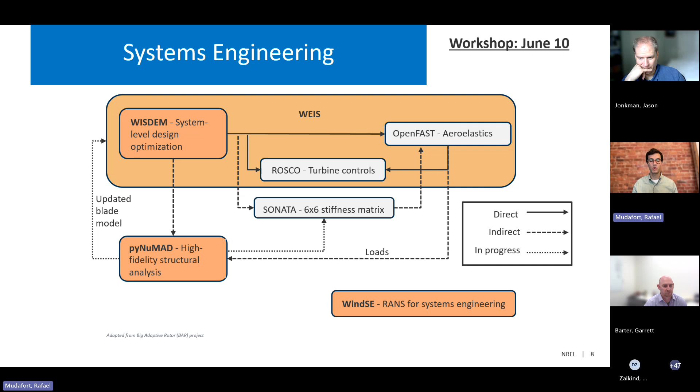And then WindSE is another software in the group down here at the bottom. It's a RANS CFD model that's designed specifically to strike a balance between the engineering scale models and the flow resolved CFD. It's tailored to specific optimization problems. It's not quite tightly integrated into this workflow yet, but it still fits into this category nicely.

The techno-economic analysis and cost modeling sets of tools can be similarly mapped. This diagram shows the tools used in different areas of cost modeling in order to ultimately estimate the total value for wind energy assets. So I'll start here on the right to describe this. WAVES is a software that models capital costs, operating costs, and energy yield to determine a total asset value. It gets the CapEx estimate from either LandBOSSE, HybridBOSSE, or ORBIT for land-based, hybrid power plants or offshore power plants.

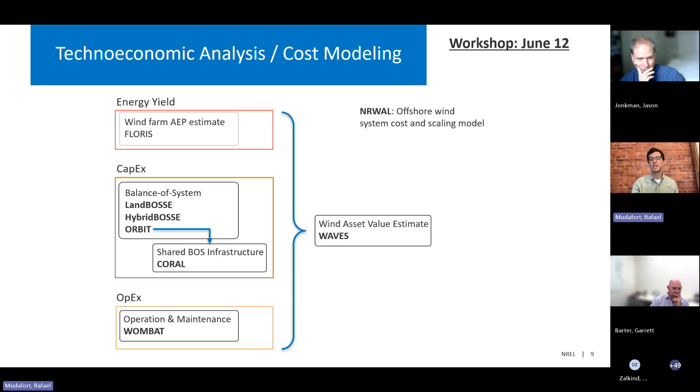And then CORAL is an add-on to ORBIT, for the offshore balance of system costs, to account for shared system installation infrastructure. WAVES gets its OpEx estimate from WOMBAT, and it uses FLORIS to estimate energy yield. FLORIS is outside of this grouping, but it is integrated into this kind of workflow. And then NRWAL, up here on the top right, is a library of cost equations for offshore wind farms, and it uses some of the other tools here to develop its library of cost equations.

The next collection of software are the wind farm analysis and control models, and these are mostly related to characterizing and improving the energy yield of a wind farm. FLORIS is a steady state wind farm wake modeling software.

It's very low fidelity, but also cheap to run and highly tunable to existing data. Its core capability is to establish the energy yield of a wind farm given a set of wind conditions. And this is often used to optimize the wind farm layout or design wind farm control strategy to mitigate wake losses or any other kind of operating losses.

FLASC connects FLORIS to field data. It facilitates working with SCADA data to enable wind farm model validation by connecting directly to FLORIS. It's also used for field experiment design and monitoring. And then OpenOA is an operational assessment software that provides common data structures and methods for analyzing wind plant operational data to determine wind plant performance. It's specifically been used to identify a variety of operational losses, and there are examples of this using open data sets included in the OpenOA repository.

And then Hercules, listed here on the right, is a real-time simulator for wind-based hybrid power plants. It integrates with AMR-Wind, which is a high-fidelity wind farm aerodynamics model in another group of software within the WETO Stack, to simulate a power plant combining wind and solar power production and energy storage. And there's an associated wind hybrid plant controller, and that's kind of the bread and butter here. It's really trying to study wind plant controls and how they can be used to balance the other system costs in this hybrid power plant.

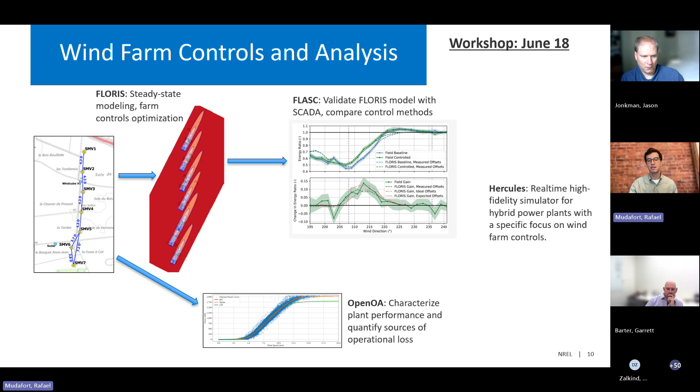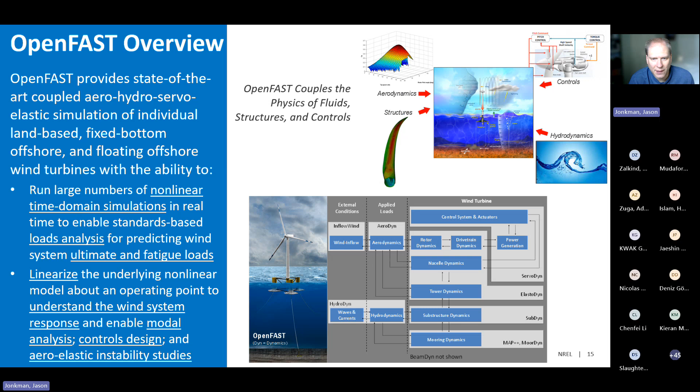This is a slide that kind of shows the core modules of OpenFAST. OpenFAST is basically a very modular architecture.

BeamDyn is our high fidelity beam type model based on geometrically exact beam theory. ElastoDyn is our original structural dynamics model based on some combination of multi-body and modal type formulation, although it's not fully linear - there's quite a few nonlinearity terms in ElastoDyn. But if you're familiar with tools like Flex 5, that's very similar.

SubDyn is our structural dynamics module for the support structure. That's fully linear in the sense of beam elements and linear elasticity. We support in SubDyn Craig-Bampton reduction, so you could take a model like that semi-submersible that likely has 1,000 degrees of freedom for all its elasticity and reduce it down to its core modes, the Guyan modes, plus some.

There's a question there. I'm not exactly sure what that means, but let's see.

And then we have ServoDyn, which is really our controller interface. There's a few built-in options in ServoDyn, but mostly it's an interface for user-defined control, because controls tend to be the sensitive part of the wind turbine system.

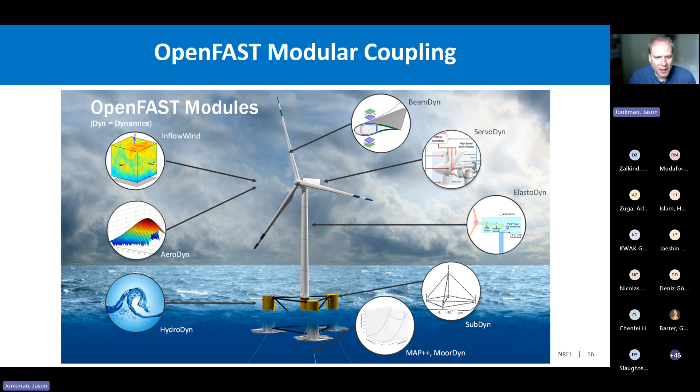Okay, give a quick update on some things that have been happening recently in case you're not fully aware. First of all, we've been working a lot on aerodynamic stability calculations and being able to introduce aerodynamic options that are linearizable for things like stability.

With some new corrections we've made - Emmanuel Branlard presented this at Torque a few weeks ago - we have quite a bit of improvement relative to high fidelity codes now.

For those in the distributed wind community, we've also done some work recently on tail fin aerodynamics, mostly useful for those in the small wind community.

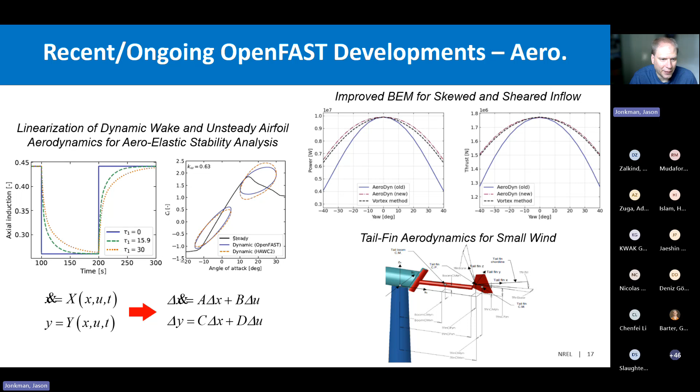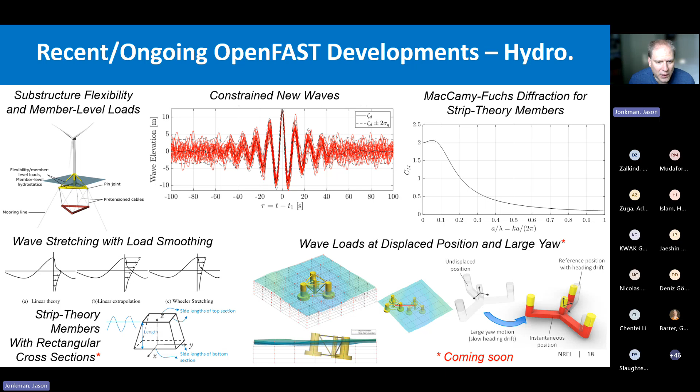On the servo dynamics side, we've introduced lots of active and passive control options. You can now basically anywhere in the system, blades, nacelle, tower, substructure, place as many actuators as you want. Things like tuned mass dampers, in one direction or omnidirectional, can be fully passive or semi-active. You can also place liquid column dampers in the system, again as many as you want, wherever you want.

For offshore systems, we've introduced buoyancy cans into the model. That's useful for things like this spider float developed by Senu Sirnivas.

And then on the mooring system, things like these SeaSpring systems that introduce some nonlinearity in them to mitigate extreme mooring line snap type loads. Really helps with that, and these elements can now be placed in your MoorDyn model.

We also have things like active cable tensioning, where if you have cables within the structure or in the mooring system and you want to actively change their length, you can now do that through a control interface. So all quite new features on control.

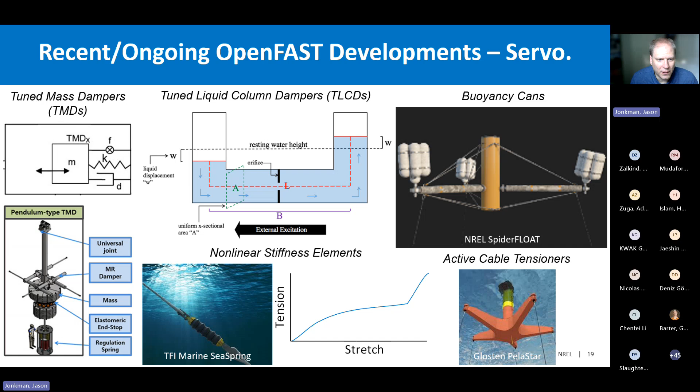On the mooring side, also quite a bit of extensions here. I'm not an expert on these topics, Matt Hall has led the team doing this, but we've introduced synthetic viscoelastic materials, quite useful for synthetic ropes, basically combining a low frequency and a high frequency effect. Used to always have to do these simulations in 2 steps, and now you can do them basically in 1 simulation, which is quite nice.

They've also introduced the ability to do full seabed bathymetry and various kinds of friction models that allow you to really represent the terrain on the seabed. We've also introduced a bending stiffness option in MoorDyn, which is really important for the dynamic power cable.

Coming very soon, I think in the 4.0 release, is also being able to do basically mooring line failure simulations, where based on some given time or a tension threshold, you can have a line break and then watch the system respond to that.

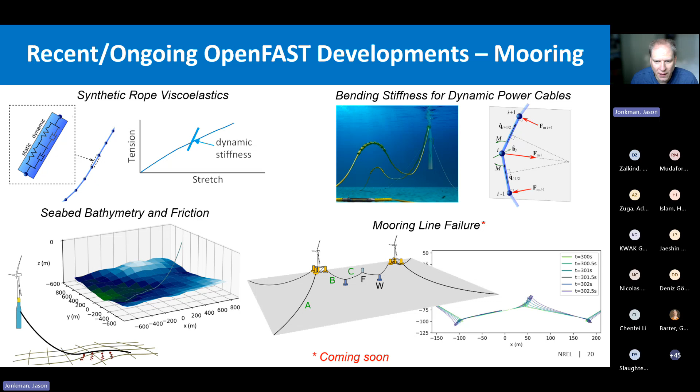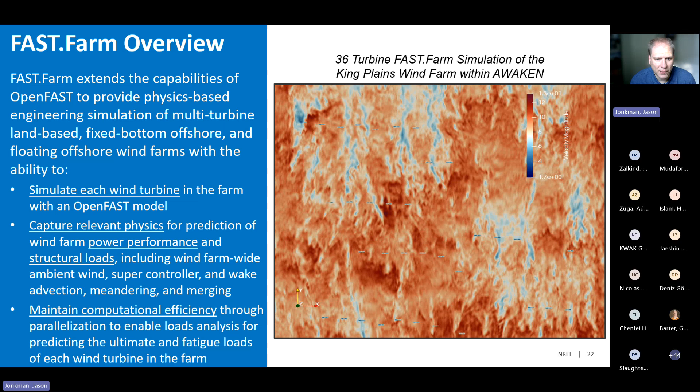Some of the novel characteristics of FAST.Farm: again, we carry the idea of the modularization framework of OpenFAST to the farm level. We've introduced modules for the wakes and the full array effect, as well as the supercontroller. FAST.Farm is based on a dynamic wake meandering formulation, and we've done a lot of work within NREL to calibrate the model to best match large eddy simulation. So really trying to do high fidelity simulations much cheaper.

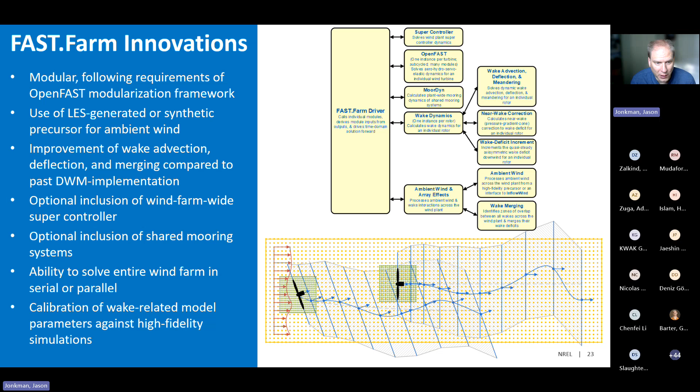Again, you can do a wind farm level controller. We've introduced recently shared mooring systems, so if you have multiple turbines that get connected not just by wakes and control, but also through some station keeping system, you can do that now in the solve. And to make it efficient, we have it solved in parallel mode if you wanted to run these simulations quickly.

So some of the things recently going on in FAST.Farm: one is the near wake correction. We realized several years ago that our model was breaking down if you had high thrust conditions. We based that on the fact that FAST.Farm has had some momentum assumptions in there, and so we've now fixed that by basically having a semi-empirical model that matches at least the mean effect of the wake breakdown in high thrust.

We've also introduced a curled wake model into FAST.Farm for things like wake steering. Often what you want to do in a wind farm is flow control where you yaw turbines, let the wakes deflect and curl away around downstream turbines. And we've introduced this curled wake model now into FAST.Farm, so you can do that dynamically.

This is just showing the transient effect that you see with a curled wake. We do obviously miss some details. If you have a step change in yaw, you get this big vortex structure that we see in CFD. We don't capture that big vortex, but we do capture the timing of the response of the wake.

We presented a couple weeks ago at TORQUE our new wake-added turbulence model. This is quite useful if the ambient turbulence level is fairly low, say less than 10%. What we find is that the wake breakdown, the shear layer in the wake, basically leads to turbulence, which can be quite important to the loading of downstream turbines. We were basically showing an underprediction of fatigue for low TI before this change. And when you add this wake-added turbulence in there, it really helps bring the fatigue back to what we expect it to be.

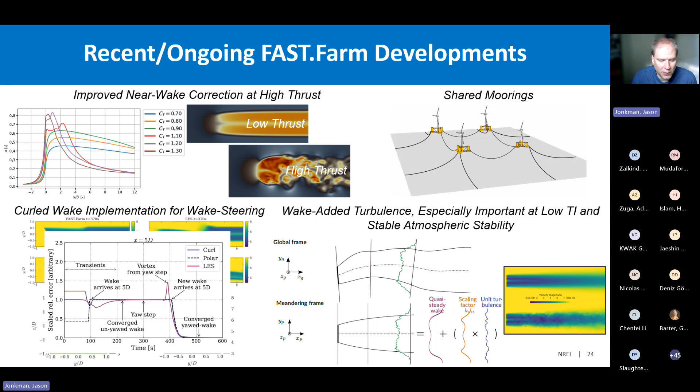As I mentioned before, we also can now do shared mooring systems in FAST.Farm, where every turbine basically has connections together, not just through wakes and control, but also through additional mooring lines. A big part of our effort is also not just developing new capability, but also doing verification and validation. I just have a couple highlights here of what we're doing.

One is our big RAAW experiment that happened down in Texas, where they took the GE 2.8 megawatt turbine and tried to throw as many instrumentation and sensors at it as they could, with a high characterization of the inflow: scanning LiDARs, radars, met towers, profiling LiDARs, not just of the inflow, but also of the wake, so things looking backwards and tracking. What we're trying to say is, if we really know what the inflow is, can our models predict what the response of the turbine is and what the wake is?

You can see the turbine is also speckled, so we have photogrammetry trying to measure deflections and so on as well. So we're really trying to capture the full aeroelastic response and do not just statistical validation, but full time-series validation of inflow to response.

Within the IEA Wind Task 30 OC6 project, a couple of things happened recently: validation of OpenFAST for things like a turbine that's surging and pitching offshore, mimicked here in the wind tunnel through an actuated system. We also did some work validating our hydroelastic capability, say with this tank test of the TetraSpar design.

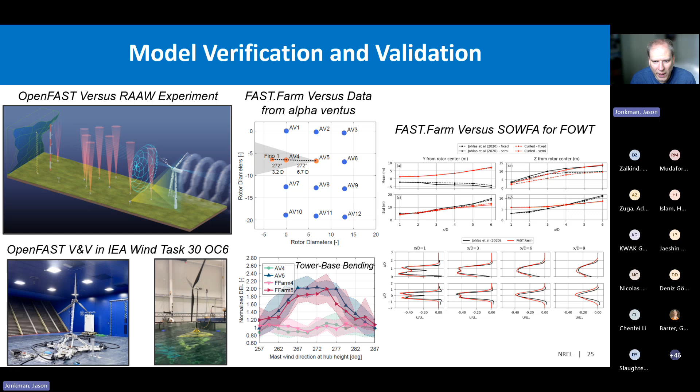Jumping a bit to workflows, and maybe I need to speed up a little bit here. Again, lots of things to cover, but just trying to summarize things. Hopefully people attending are generally familiar with OpenFAST. The overall workflow with OpenFAST is to be an engineering tool to advance wind technology. And because we're not fully resolving everything, we rely on a combination of things, really calibrating coefficients with, say, high-fidelity data or computational solutions or measurements.

We bring in any sort of new technology innovations that come down the pipeline. We want to make sure the tool can analyze those things. And a lot of our processes are based on what the standards require. And looking at the applications of FAST.Farm, it's really about advancing the technology of wind, looking at novel concepts, sensors, offshore structures, and of course, moving from turbine-centric to farm-centric design.

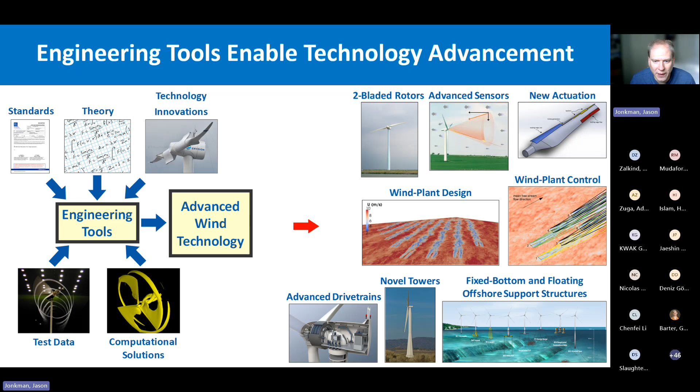In terms of the overall workflow, obviously OpenFAST is there in the center of the analysis. OpenFAST requires lots and lots of inputs to be defined, from the airfoils to the structural properties, controller, the inflow, hydrodynamics, and so on. And we've developed a number of preprocessors, AirfoilPrep being a core preprocessor for the airfoil data, taking basically 2D wind tunnel type data and extrapolating to 3D for rotational augmentation and doing things like unsteady aero models.

TurbSim, or the Mann model, used for inflow generation. ROSCO, Dan will talk about that, really our baseline controller for wind. Of course, you can have your own controller if you're in industry. On the structural side, codes like pyNuMAD that Raphael mentioned, or ANBA4, used for structural analysis, could also fall in that mix. And then to compute mode shapes, the old code BModes is often used, but we're trying to replace that with pyFrame3DD.

And then on the post-processing side, the big output of OpenFAST is time domain responses, and there's a number of tools used to post-process that.

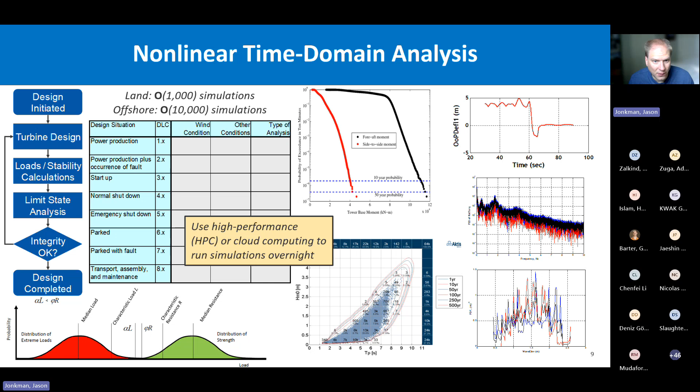Big workflow, of course, is nonlinear time domain simulation. Usually you're following things like the IEC standard for running through all your sort of load cases, from operational, non-operational cases, really with the goal of predicting what your loads are and the tail end loads, hopefully, which are less than your resistance of the material. And typically you're using some sort of script that runs all those cases, likely in some high performance computer or some cloud computing environment. And of course you can predict time domain simulations, but often in the end you post-process that with statistics or PSDs or extreme events or something.

You can use those models, of course, to do things like Campbell diagrams, natural frequencies as a function of speed or wind speed, damping ratios as a function of wind speed. Of course, you can also do calculated things like control derivatives, change of thrust with pitch or thrust with wind speed or so on.

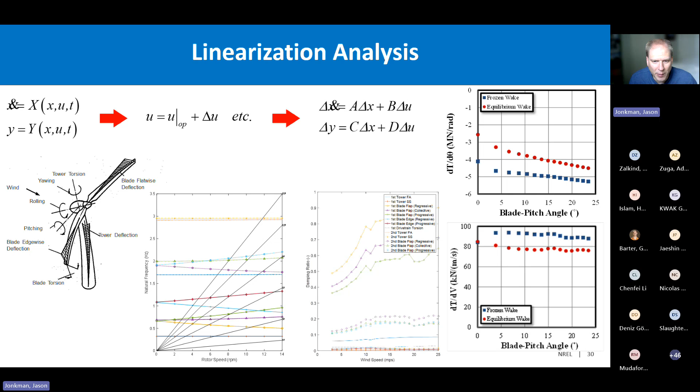Two other types of analyses we've been doing a lot of recently: one is sensitivity work to try to figure out, there's thousands of inputs to OpenFAST, what really matters in your design. We've been using an elementary effects approach to look at that, basically looking at, if you have perturbations of input, that leads to perturbations of output, and which ones are most sensitive. And so we look at not just the gradient of input to output, but also how large the range of that input would be. And that kind of dictates, if you look at the tails of that distribution, you figure out what's highly sensitive. And we have a number of publications on that.

Another new direction we've been pushing is on use of OpenFAST, not just for design applications, but also digital twins, basically using OpenFAST as a virtual sensor. So combining the OpenFAST model with actual measurements from the asset, with things like a GPS unit or SCADA data that you may have on an asset, using that as a virtual sensor, so you can output things like the tower moments or blade moments that you likely can't measure on all assets. And we're hoping to use that for O&M type applications. So more to come on that.

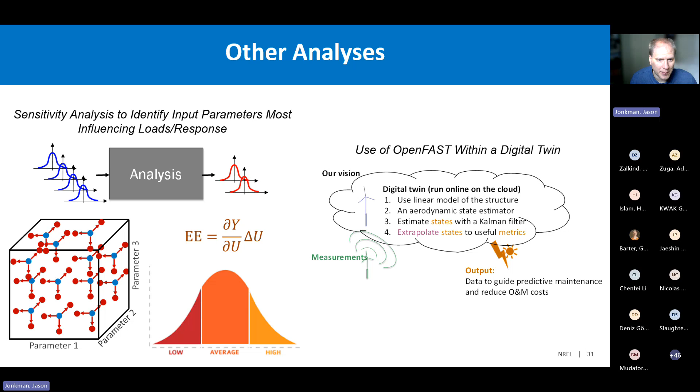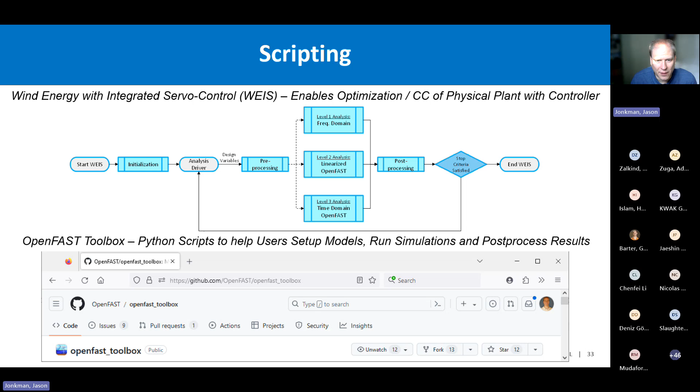So WEIS was mentioned earlier by Roth. That's our main script now that we use for turbine optimization. You can also just use it for executing IEC load cases. We're adding support for most of the IEC load cases in the current version of WEIS. But if you want to do more than that, you can also feed back in the process and do full optimization of the system. Just want to also mention we have this OpenFAST toolbox in Python that has a lot of scripts for basically setting up models, running the simulations, and post-processing the results.

Once we get to the poll coming up here soon, we'll talk a bit about roadmap. I don't know, Raphael, if you want to keep going here or bring this up later, but we're out of time, so I think we should shift to the other tools. And then if there's time on the back end, we can bring this up again, especially for the discussion. Yeah, let's switch over and I'll introduce this right before the poll then. All right, Derek, you'll have to take control and skip over a few slides. All right, let's see.

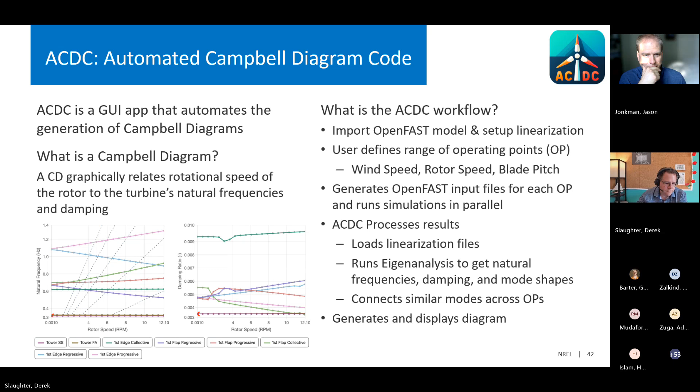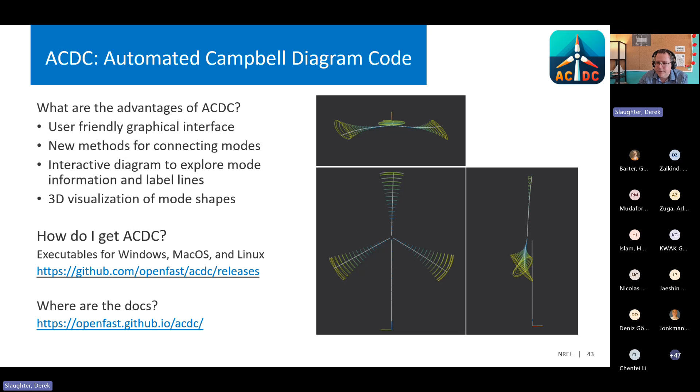So how do you get ACDC? It's available on GitHub. There's releases. There's executables for Windows, Mac, and Linux that you can just download and run. And then there's a link to the documentation, which is 90% complete. All right, and I'm going to do a real quick demo of it for you guys. So hopefully, there we go.

All right, so you download it, you get the app for Mac, or you get a Windows executable or a Linux executable, and you just run that and it pops this open. You can create a new project or open an existing project. For time's sake, I'm just going to open up one that I've already got, and it will display a little bit of information about the project. For the model, this works by importing the FST file, and then from that it will import all the other relevant data.

Once you import it, it does not use those existing files, so you kind of have to do any editing through the GUI here. To get quickly to a linearization setup, you can just click defaults, and you'll see some of these things changed to what we consider somewhat basic linearization settings, but you can also come down here and look at any of the files, and relevant fields that you may want to change while doing the analysis are specified. All right, next part.

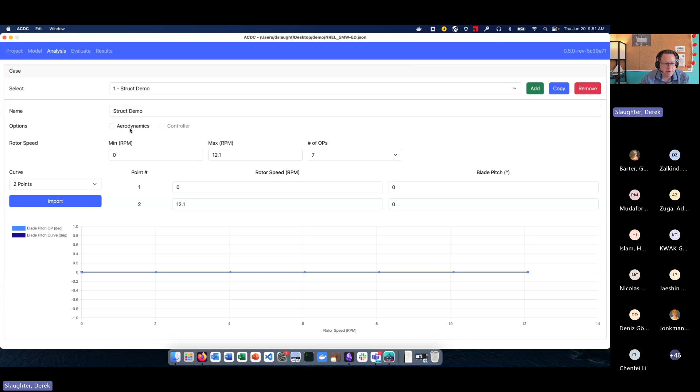You have to define the operating points that you want to use. So things like minimum RPM, maximum RPM, number of operating points you want to generate. You can have a table here where you specify all these values. For this particular analysis case, there's no aerodynamics, but you can also define structural plus aerodynamics, in which case you have to define a trim gain, wind speed, number of operating points, and the curve.

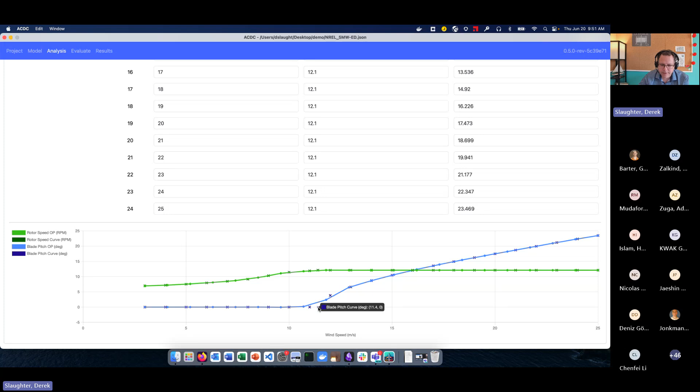The curve can also be imported from a CSV file, which is useful when you have a lot of data. But this is what this particular curve looks like for the NREL 5 megawatt land-based turbine. And as you'll see here, the blade pitch curve and the rotor speed curve versus wind speed. These are the points in the curve that are specified, and then the operating points are shown via the line.

All right. So then you come over here to evaluate, and you want to actually run the simulations. So you select which case you want to run, you click start.

First, before that, of course, you need to select the OpenFAST executable. This has to be on your system already, and the version of the OpenFAST executable needs to match the version of the input files that you're using. I tried to make it somewhat OpenFAST version agnostic, but this has been mostly tested with the 3.5 series.

All right, as you can see, I set it for 7 CPUs, and it ran all these simulations in parallel. It shows the progress during the simulation and then during the linearization steps. If there's an error or something, you can always click on the log, and it'll pop up the output file, and you can see what went wrong or just see how long it took.

Right. So once these have been completed, you can click on results, click on which thing you want. For the analyses that are defined inside of ACDC, you can just click on the folder. This also works with linearization files that you may have generated outside of ACDC, in which case you would click Browse and just open up the folder that contains linearization files.

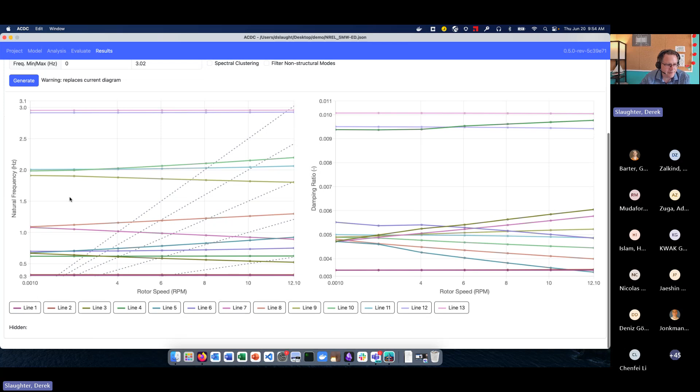And so now you've got these lines, but you don't actually know what they are. So you can click on any of the mode operating points here, and it will give you the information for it, which line it's on, all the data associated with that mode, and you can click visualize, and you can see the turbine wiggling back and forth. The scaling is controlled here, so this doesn't show a whole lot of motion. You can just click visualize again after changing the scale and see that happen.

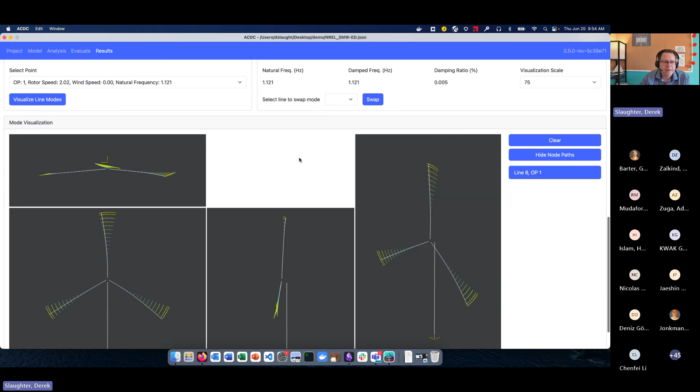Another nice feature is if you want to visualize the entire line, maybe you want to see if there's something that changes across it. You can come down here and say visualize line modes, and it will load all of the operating points across that entire line. And so you can quickly check and see if they all look kind of similar. Yep.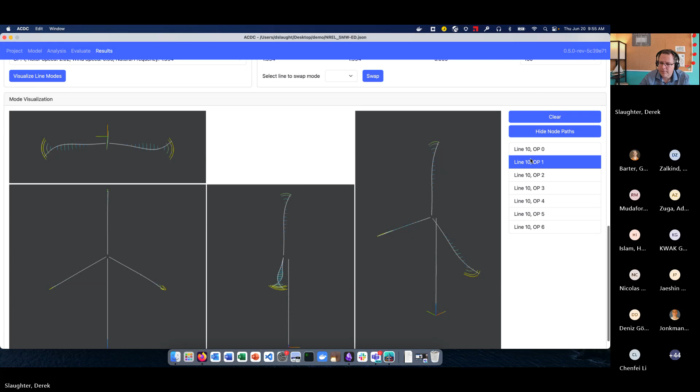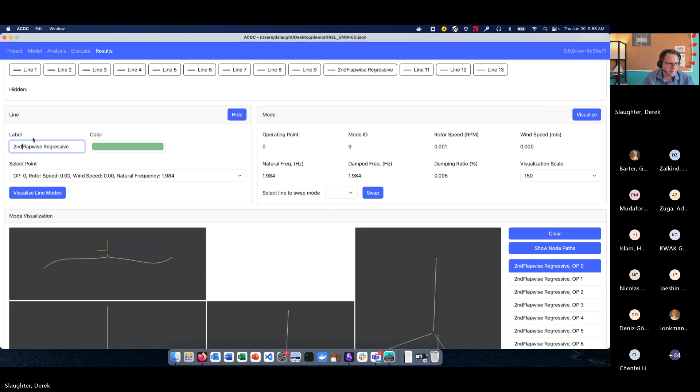From there, if you don't want to see them, you can hide the node paths and see just the wiggling shape of the turbine. So this is how you identify the various modes. Then you can come back up here to the line and say, you know, this is flap-wise regressive, perhaps second flap. And that will update the labels here, and then you can export all of the data for the Campbell diagram using this button, export.

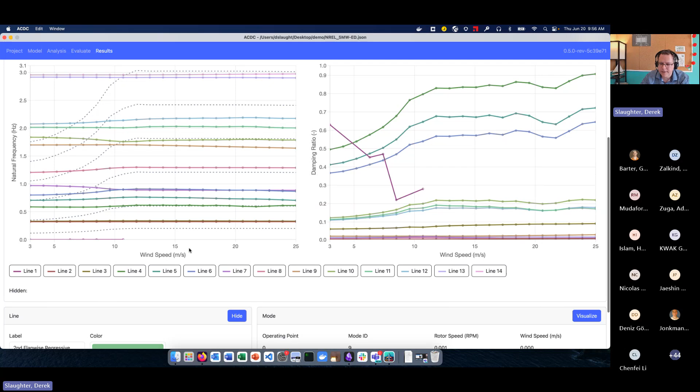Real quick, for a case with aerodynamics, it will do all the plots versus wind speed, with these dashed lines being a multiple of the rotor RPM speed. So we've got 6 times, 3 times, and 1P, 1 time the RPM of the rotor. So you can see where these potential crossings are, what the frequencies are, and so on. Let's see. This is a little bit slower because there's aerodynamics involved, but yeah. All right, and that's it for ACDC.

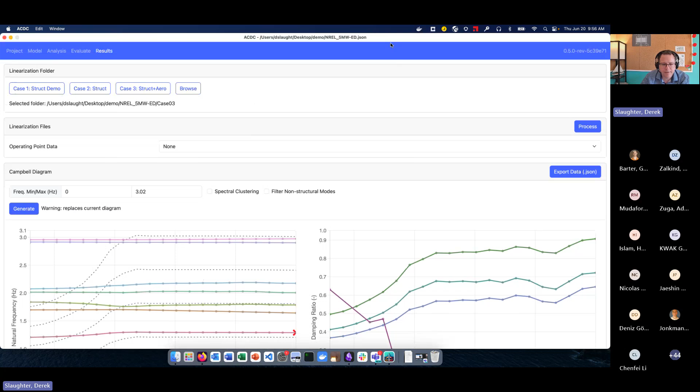Thanks, Derek. That's very cool. Sorry, I just need to share the slides again. One sec, Dan. For some reason they're gone from the Teams option to share them. So let me just download them quick, and then I can share from my screen. Do you want me to load it up? I've got it somewhat handy if you want me to do that. Somehow now it came up, I think. Cool. All right. Teams taking me through a loop. Do you see it okay? Yeah, I do. We're on slide 45. All right, here we go. Take control. It's all yours.

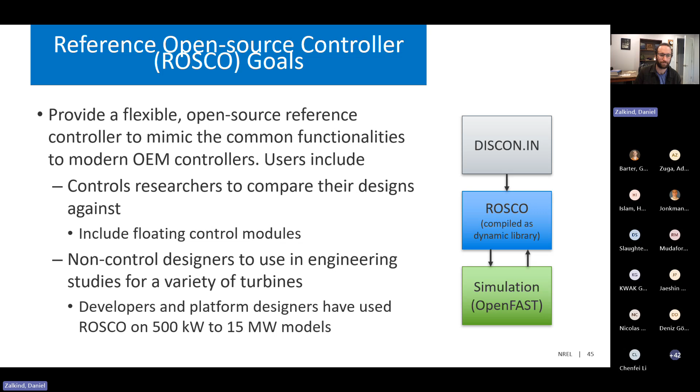We also have within the ROSCO repository this ROSCO toolbox. This is a Python-based tool for tuning controllers, so it's going to take turbine parameters, things from the OpenFAST model, a few things from the OpenFAST summary file. We can generate CP and CT surfaces within this ROSCO toolbox and use these as inputs to a tuning procedure where with just a few tuning parameters, things like pitch control bandwidth and peak thrust, we can come up with the whole list of gains and set points that are in these DISCON files.

There's like 100 lines in this DISCON now. Every time we add a feature, we add some new inputs, but they can be rather detailed and specific to turbines. So we really try to make this ROSCO toolbox a way to simplify that whole process. So give it an OpenFAST model and a few parameters, and you should be pretty close to a controller that works. Also within the ROSCO toolbox are a number of file IO tools, so we can run OpenFAST simulations within the ROSCO toolbox, and there's other helper functions for analyzing and looking at controllers.

So the ROSCO software itself is this Fortran-based code, this Bladed-style dynamic library, and really the only thing that goes between ROSCO and OpenFAST is what's called this AVR swap. It's an array of floating point numbers, and essentially it's just taking a few measurements from OpenFAST, things like the generator speed, the power. It has a measurement of your hub height wind speed as if it's coming from an anemometer. It has some loads on the blades, and it has accelerometer data.

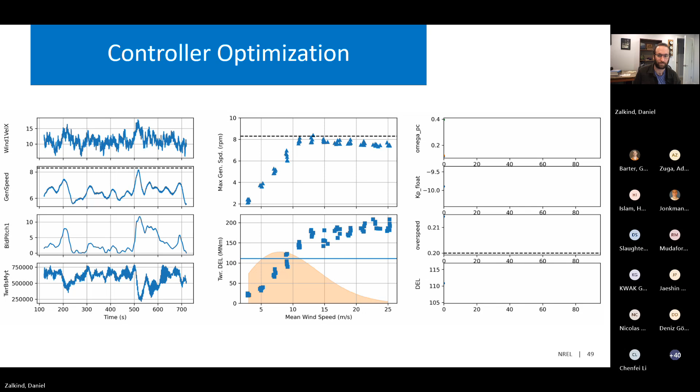So just looking ahead in ROSCO, I'm working currently on this power reference control. So if you need to derate your turbine, or even simulate power boosting, you can do that through changing your speed set points, by changing your maximum torque, or also changing your fine blade pitch if you want to derate across all wind speeds.

We are working on some additional floating feedback configurations. There's a way to do it with both the torque and the pitch control.

And then the next thing that we're working on, that I think is kind of big and is also funded by this WISE project, is support for all IEC design load cases. So right now ROSCO is pretty much just an operational controller, but we're working on additional startup, shutdown routines, maybe some condition monitoring, and ways to really control the turbine that are straightforward for all the IEC DLCs, so we can do these full suites of simulations.

Looking forward into the medium term, over the next year or two, we really want to put out this test bench for controller performance and quantification. So folks are starting to use ROSCO as a comparison for their controls, but folks still compare things in different ways, different cases, with different cost measures and different constraints.

So we want to try and put out a standard set of cases, maybe some standard cost measures and constraints, ideally informed by the users or similar to what the OEMs are doing, so that when people put out controls research papers, we all know that we're playing the same game, at least.

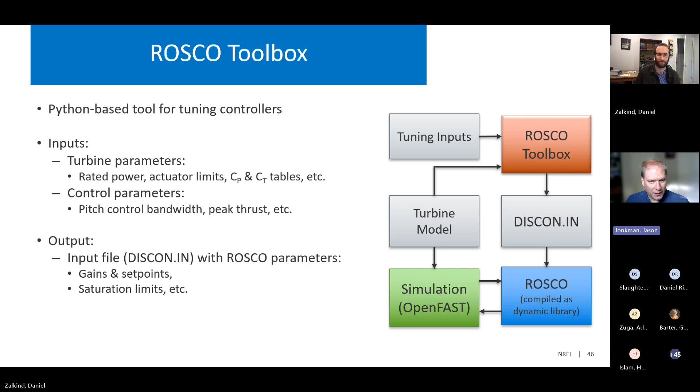Talking about the roadmap of where we're going, I'd say we have four main pathways on the software development side to improve OpenFAST. One is improving accuracy, using data or high-fidelity model results and experiments to make sure codes, particularly aerodynamics or hydrodynamics, get more accurate over time. Also looking at advanced technologies, anything coming out with new sensors, actuators, or novel concepts like multi-rotor systems, being able to support those.

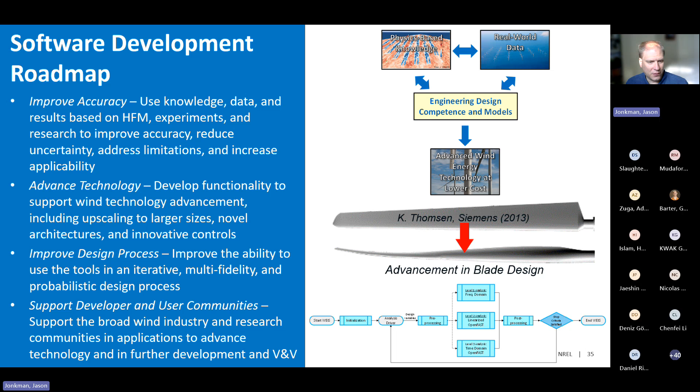We're working a lot on improving the way the tool is used, things like ACDC and ROSCO, and how to do multi-fidelity type simulations. Another big part of our approach is how we support users and developers, trying to make OpenFAST not just an NREL-centric tool, but one that supports community contributions.

In terms of software quality, we've graded OpenFAST through a rubric across areas like accessibility, usability, and documentation. We understand right now OpenFAST is a mixed bag—some things are really well documented and some are not well documented at all. Extendability, community health, these are all things we graded on. I'd say OpenFAST in our grading system has gotten fairly a medium—some things are well characterized, some are not treated very well. We'd love to work on improving that.

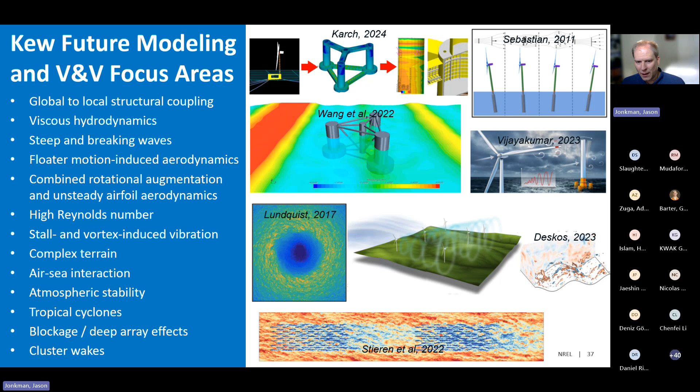Let's see—I just want to mention two things before we go to the poll. I think it's worth touching on this briefly: there are two ways to engage with us through open source, one through our forum, one through GitHub. Most everyone's familiar with those two. Of course, if you're an industry member willing to pay for support beyond this general support, we're happy to do that. And to be clear on how we get funded for this work, we have four ways of doing this.

Another thing we've been pushing is to offer support for the consultants that take advantage of tools like OpenFAST in their consulting services. We're trying to set up partnerships so we can offer back-end support, doing further development and validation of OpenFAST, and solving the research-level challenges these front-end consultants are facing.